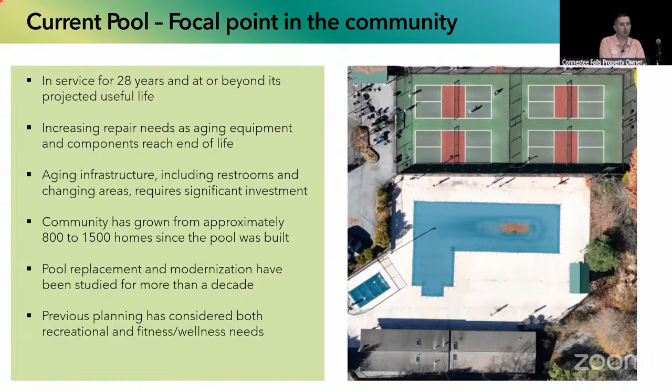So the pool survey and the member priorities identified within the survey. We have a core demographics dilemma. The survey identified multiple pool concept preferences. Community feedback highlights a challenging diversity of user priorities, caused by two distinctive resident user groups differentiated by pool usage and their own needs.

So the demographic breakdown: we have fitness and wellness users. They seek structured exercise, water aerobics, and low impact activity, and they value predictable conditions for fitness and wellness programming. On the other hand, we have recreational and family users seeking recreational swimming, family activity, and social use, who value flexibility and unstructured swimming and play.

So our main dilemma: how do we integrate everyone's wants and needs into a one pool, everything design that supports a community the size of Connestee, with expected future growth and diverse pool priorities?

So what matters most for a new pool? Members were asked to rank their priorities for the future of the pool facility.

59% said maintaining quality amenity for future generations. 49% stated managing long-term maintenance costs. 39% supporting fitness, exercise, and wellness. 33% extending the pool season. 31% supporting recreational and family use. 25% for maintaining strong reserve funding.

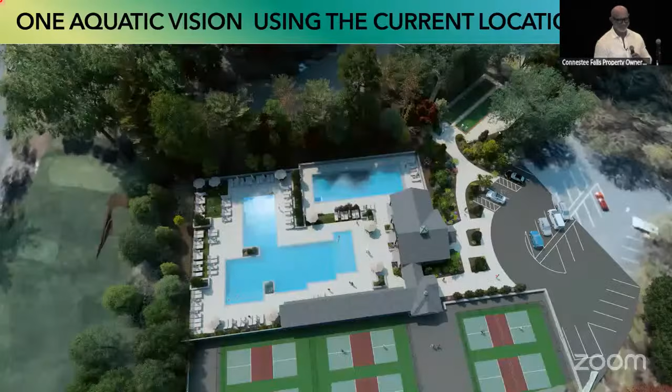No? I think your mic's buried there. Maybe we abandon that and go handheld. Bueller. All right, IT likes to sabotage me with these things too. Hello, there we go, all right. So y'all saw that 16% of the community said there's no need for any improvements — is that who we have here tonight? Okay, check, sorry. All right, let me — I think it's the video. The video, Larry, did you add it in? Let you — play button, Larry. All right, let me let you look at that for just a second, because unless you've seen it, everybody's oriented by where the pickleball courts are. Correct, what? There you go, there you go. Thanks, it's off screen. Your bocce ball court's up to the right.

You see we've got two pools. The one on the right is the wellness pool. So we're going to focus on the family pool here for just a second. Its primary focus is recreational swimming, active play, and family use.

There's separation that allows active recreational swimming and structured fitness programming to occur simultaneously. Right here you see a zero entry, with bubblers at the entry that can be turned on and off — maybe on for weekends when a lot of grandkids and younger kids are here.

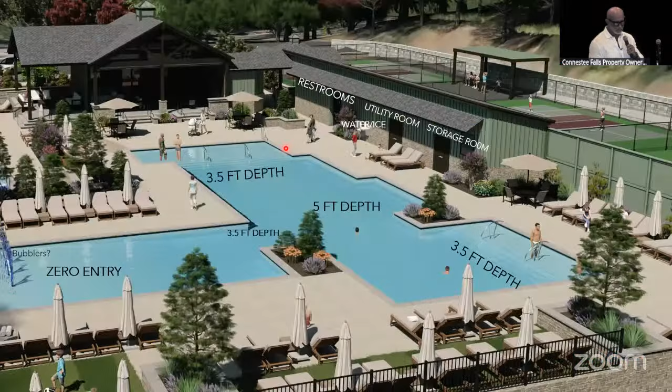Oh, nice job, Larry — Larry added this for us. Zero entry here, 3.5 feet, 5 feet in the middle, you can kind of see that. Zero entry, some people call it a beach entry — good question — it just starts off at a 10% slope, if I'm standing on the pool deck, until it gets all the way down to 3.5 feet.

We try to do the best we can to not make an environment like this look institutional, so we can introduce some plantings, as you see here. That helps define this zero entry area, adds some softness, and adds some vertical elements as well.

You see we've got an open air pavilion here, with the restrooms, and also a pass-through and a gate to the pickleball courts. So you guys can come right through that gate and immediately get to ice machines, water fountains, and bathrooms. You've also got a shower, a full ADA shower, in each bathroom for you to use.

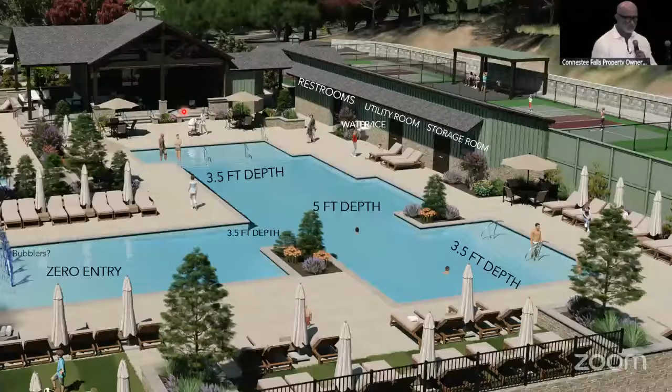I'll go ahead and say this about the pavilion. We are making provision to be able to enclose that with clear screens. You may have seen those that zip down, roll down. I think that'll be a nice feature in the fall and winter when you encounter cooler temperatures.

This shaded area to the left is primarily focused on the wellness pool, which we'll get to in just a second. Your fitness and wellness pool, that's looking from under that shaded covered area.

You've got 3 lap lanes. Currently, we've got it drawn at 70 feet long. One of your neighbors was pretty insistent that 75 really does matter to you swimmers. Do we have swimmers also here? I get that, you get used to that cadence and that number of strokes before you make a turn. I think we can accommodate that. I'm not promising anything, but I think we can accommodate that.

This pool also has an automatic cover. I know many of you know what I mean, but I'll explain. It's a cover that runs underneath the coping on each side. So underneath the coping on the far end would be the vault. That's completely hidden. Then at a press of a button, the turn of a key, or the entry of a code, it opens or closes.

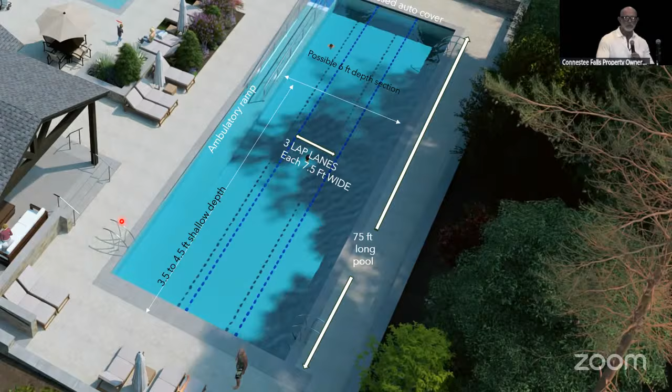It's on the far end over here, and when it's open, the bar will actually come underneath the coping. It'll be almost invisible when the cover's open. You'll be pleased with it.

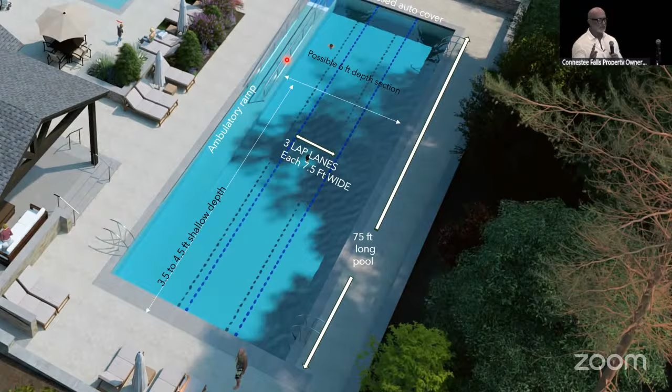We're kind of tossing around this ramp. You know, with the ADA, we're required to have ADA access to the pool. You can do that in 3 or 4 different ways. The ramp is one. Everybody's seen those chair lifts that kind of lower you down into the water, that's a means. There's some other things that probably don't apply to this pool, but yeah.

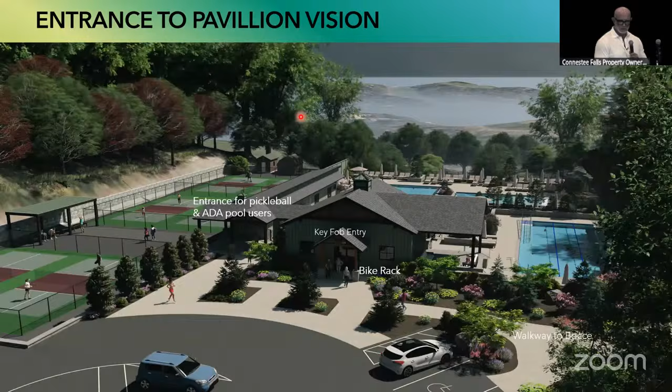There's going to be some questions about that wellness pool. Hope I covered everything.

Here's a nice view of the front. You can see one thing that I noticed when Nathan and I first met out here was the need for separation from the pickleball court to the pool space, the poolscape, the pool environment. There was a few of you guys over there playing, and we were having a hard time having a conversation, just the noise, the dinking. And I play pickleball, by the way. I'm sure I'm probably a 1.5 or something, but probably some 4s and 5s in this room.

But we're improving your entrance as well, visually and I think functionally, to the entrance to your pickleball court. You've got some shade here, and hopefully some improvements to the drainage in that area. We're going to add on to this wall that separates these front 2 courts, and add some landscaping.

You'll notice the shape of the roof, the slope of the roof of the bathroom structure right here. It's angled, shedding toward the court. So if you hit a ball up there, it's going to roll right back to you. We're going to put gutter guards over the gutters so it doesn't trap your ball.

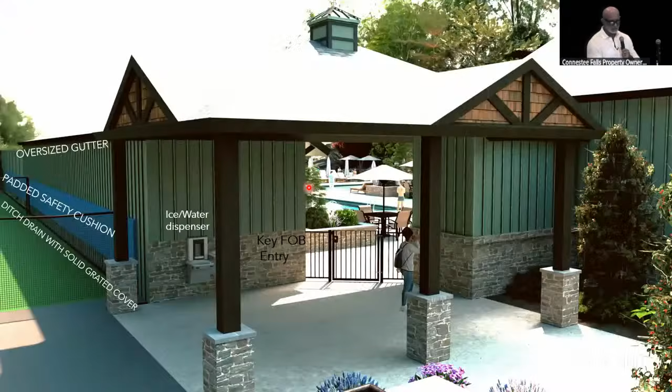Larry added some of my renderings to the presentation. I haven't seen it yet. Nice job, Larry. Y'all need to thank Larry. He's worked countless hours with me, with Nathan as well. It's just been a joy to work with.

So y'all notice the steps. I didn't mention this, I'm going to jump back just a bit. You notice the steps coming out of the pavilion—this is your handicap access through this gate right here to the pool environment.

Your courts currently drain toward the pool deck, right? I don't know if you knew that or not. So with this building, there'll be a large trench drain, more than capable of carrying that water off your court and not ponding on your court. So where your current fence is, imagine at that point there'll be a grated, smooth, covered trench drain, and then you've got the padding in the back of the building. Does that make sense? You're not losing space—you're actually probably going to gain about a foot right there.

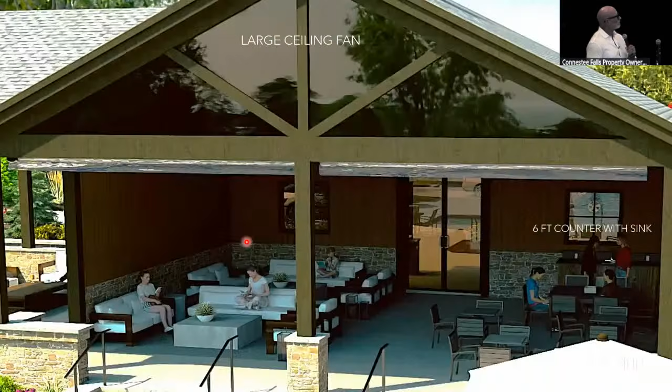That pavilion is wide open. I think the only thing we've put in or proposed right now is a little small counter sink in that right-hand corner. No bar—you're wide open. It's a very flexible space.

You can kind of see my attempt to render the plastic roll-down enclosure. The software didn't do a very good job on the plastic.

All right, I think this is where Nathan comes back in. I'll look forward to your questions. Thank you, Mark. Okay, so let's get back to why a two-pool solution is being recommended.

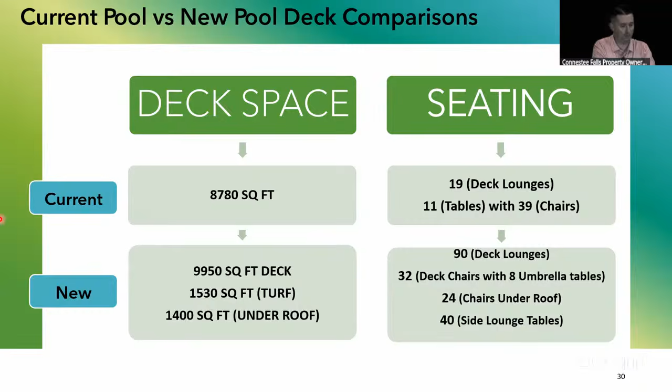So a few thank yous. We wanted to thank the Facilities Planning Committee for helping us get to this point. This team has invested significant time and effort in developing a comprehensive understanding of the marketplace, considering design alternatives, industry trends, gated community benchmarks, engineering considerations, and related factors influencing the project. The unique aspect of this initiative has been our collaboration with Medallion as subject matter experts to refine and finalize design details, including rendering, RFP documentation, vendor evaluations, and other critical project components. This collaborative approach accelerated the project timeline while achieving an unprecedented level of detail for a capital project at this stage, fostering meaningful cross-functional exchange of ideas and enabling more informed, data-driven decision-making. I want to thank our Facilities Planning Committee: Dan Glassow as our chair, Bradley Caldwell, Joe Laps, Bill Mills, Ed Thomas, Vic Tipstra, Vince Tidwell, Chip Webb, and Larry Rourke as our board liaison.

All right, so Q&A. One second real quick.

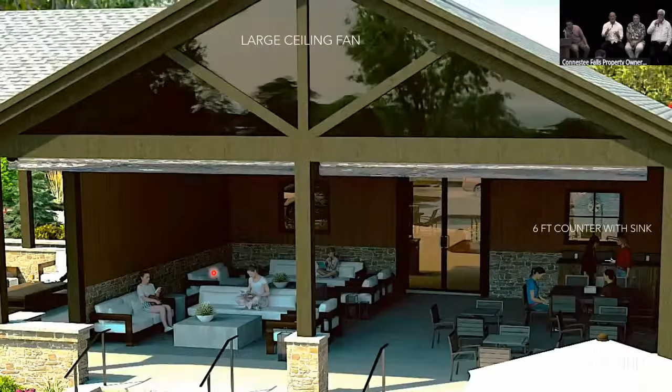We're not going to touch any of that. All I'm proposing is that we fix the drainage, because right now everything's funneling to right here, right into there.

That big drain - well, this wall is just a segmental wall, loosely stacked. Everybody's seen it, right? That's not a waterproof wall. There's kind of a small, slight valley shooting through there where that person's standing.

I want to add landscaping to soften this, and I want to bring that wall up a little bit more. We'll probably take that wall out and pour a proper wall that's waterproof so you don't get migration of soil moisture onto this area behind the wall - onto Court 1. That would be great if you improved the wall.

Don't take the wall away. No, I'm gonna raise it up. I'm proposing to raise it up a little bit and make it waterproof, make it an actual retaining wall.

My only suggestion - leaving the wall - is that landscaping in this rendering along the side of Court 1, please don't put that in. That's going to cause shadowing on our court which will interfere with play. And based on those arborvitae or whatever those trees are, the roots could grow down and compromise our court surface. So I would leave that landscaping completely off, personally.

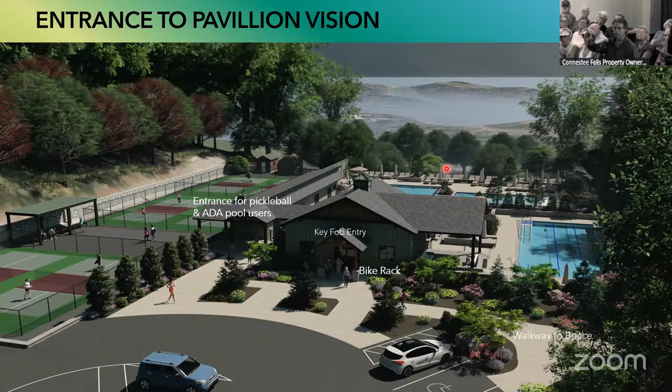If we saved money by going to a 1 pool solution and let the aerobics people know - hey, you're gonna have to figure out how to play nice with everybody else - is that on the table?

Al, are you asking what would the difference be in cost? Yeah, what would the difference be in cost? And then in the future, if people really wanted it, might we be able to add it later, versus making accommodations for it now. And then later saying, hey, we really wanted a two-pool solution, let's rip it all out and do it again. Well, I think your survey answered your question.

If you go back to the survey, you really had two primary groups expressing a need for fun and activity, and another large percentage of the community that wanted fitness and wellness. Along with that, a large percentage mentioned the short season. So the two pools, specifically the wellness pool, address that well - the fitness, the exercise, the classes, which by the way you can also do while you've got lap swim going on at the wellness pool. You can do classes in the big family pool. Your year-round usage - we can't cover a big pool.

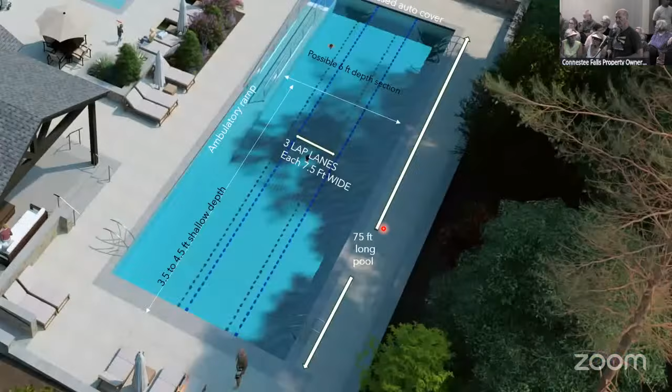That's where the vinyl curtains are that Mark mentioned in the rendering. Just from the pictures shown earlier, it looked like there were doors, windows, and an interior space. If you're in the parking lot looking toward the pavilion, that's where the entry is, and there are two windows, I believe, in the drawing. Then there's a partial wall to the fitness pool area, totally open into the pool area, and we have a storage room on the right side.

Okay, so primarily an open space, but shaded for the people that don't want to be out in the sun. Correct - so the golf course side would seem to be the most practical spot, leaving the parking lot side wide open for people who want sun exposure throughout the day, giving a bigger area. That was one concern I had. Plus you've got existing infrastructure with the bathrooms on the clubhouse end of the pool, as opposed to putting it on the pickleball side. So from a cost savings standpoint, why not use the existing infrastructure where the plumbing is set up, save that cost, and leave the building over on that side.

And if I'm on the golf course, I can hear pickleball. If you're at the pool, that building may cut back a little bit, but you're still going to hear pickleball, so I don't see that as a real sound issue at all. I just can't imagine that building not impacting pickleball play during the months of construction - it's going to impact those courts.

During construction, at some point, we're not sure we'll be able to use those courts, right? We can't help that during construction - it's going to impact a couple of courts, it's inevitable. Those courts are going to be impacted, so we know we're not going to have 6 courts throughout the winter while this construction is going on. We're going to lose those 2 courts, for short periods hopefully, yeah.

Well, fortunately it's during the winter time, so the planning makes sense to have it done when we have a lower usage at that point. But if you've got the existing building already over there with the infrastructure, plumbing, drainage and everything else, why not put that building back over there and leave it there? Minor savings, but I understand what you're saying.

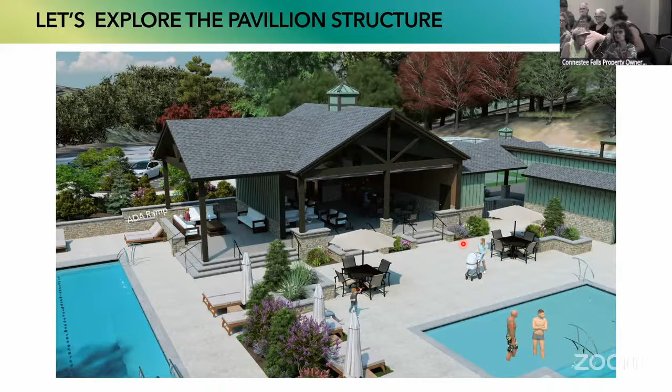No, I mean, in the morning you can do the whole width across. And that gets crowded in the morning and you have to wait your turn. Is that going to accommodate us? So could you explain the 2 pools?

You've got 3 lanes in the wellness pool, as we stated earlier. You've also got the opportunity to have classes in the family pool, but you wouldn't necessarily choose to schedule those there. It's not deep enough in like the 3.5, and then it's too deep in the 5 foot. There's everything in between, so you can find your depth.

If 3.5 is so shallow, are the fitness classes going to be in that pool? I don't know, it's up to you, I mean that's kind of an important determination we haven't made. If you don't need deep water, you've got a lot more area for fitness classes in this pool now than you have currently.

Another thing, you have kids with diapers that now go in the kiddie pool. What are you doing with this pool? You mandate that kids wear swim diapers, and they're not allowed to be in there otherwise. They have to be in the kiddie pool right now. They wear swim diapers in most, not all, commercial pools. The way it is now, they're not allowed to be in there unless they're potty trained.

In all of my other communities, and I've been in 6, and even in my personal communities, I have young children myself, we wear swim diapers. They don't, and yeah, we encourage them to be potty trained, but that's difficult to enforce. Okay, so you're not doing anything about that. We didn't say we're not doing anything about that.